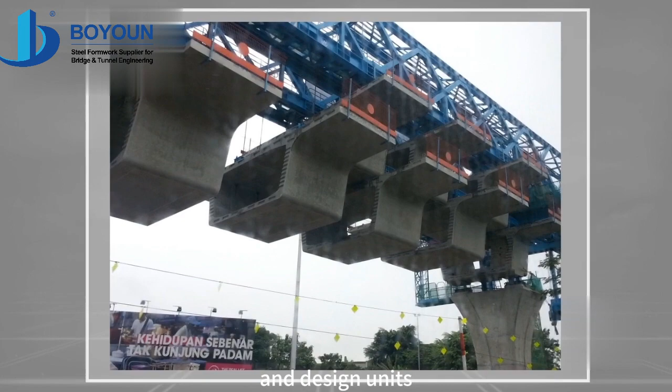With the rapid development of railway and highway infrastructure construction, the segmental assembling method is more and more valued by the construction and design units, and has gradually been popularized and applied.

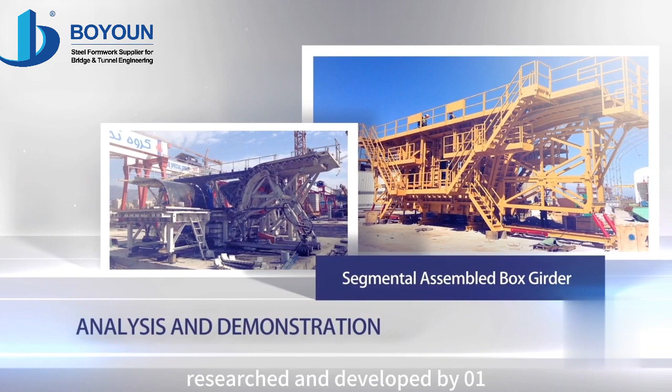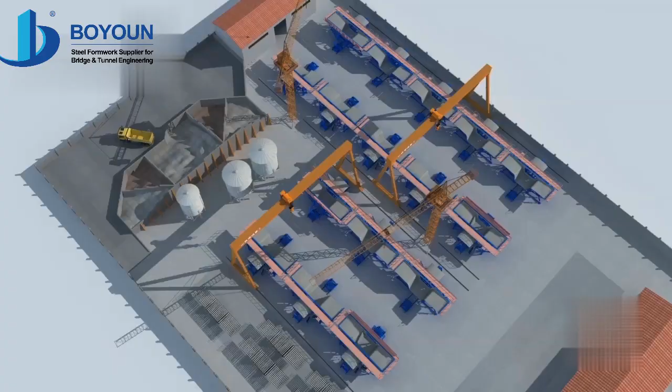Shandong Boyoun Heavy Industries Company Limited researched and developed the BY-01 automated segmental box girder prefabricated system through analysis and demonstration of segmental assembling technology at home and abroad, combined with its own experience in bridge formwork design, fabrication, and construction. The system has a clear structure, efficient operation, beautiful shape, and distinct edges. The construction method provided by this video is only for reference.

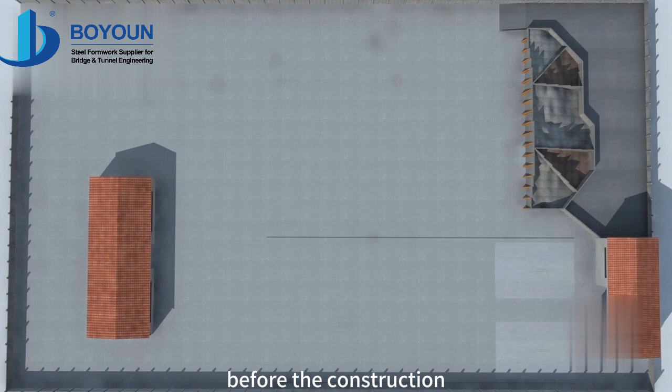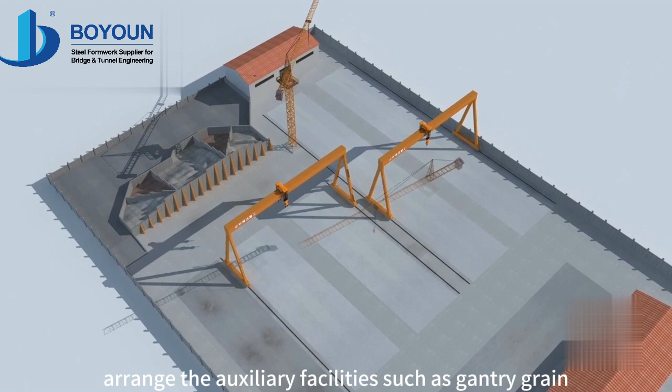Construction preparation: before the prefabrication of the box girder, complete preparations including hardening of the site and girder pedestal setting. At the same time, arrange auxiliary facilities such as the gantry crane, concrete curing equipment, and steel processing equipment in place.

Structure introduction: the system is composed of the bottom formwork system, side formwork system, end formwork system, internal formwork system, and preset system, among others.

Bottom formwork system.

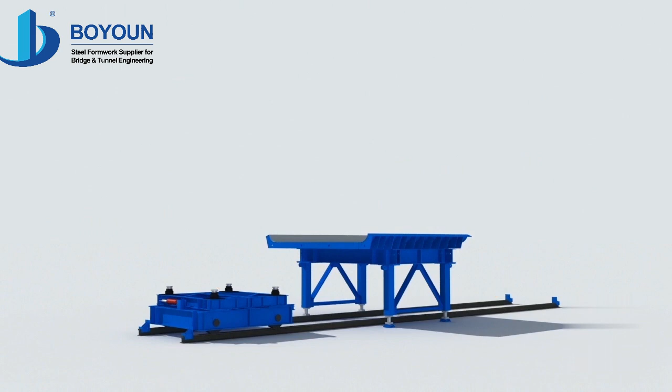Side formwork system.

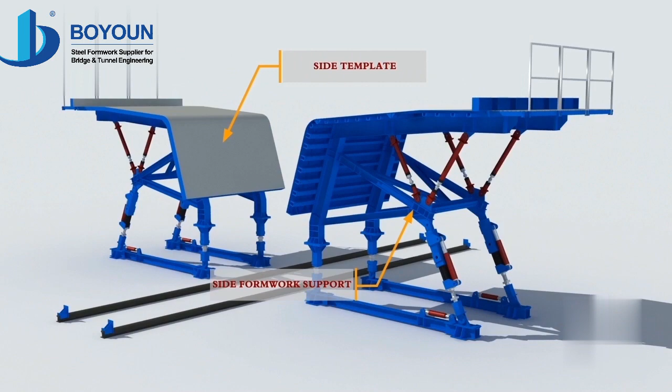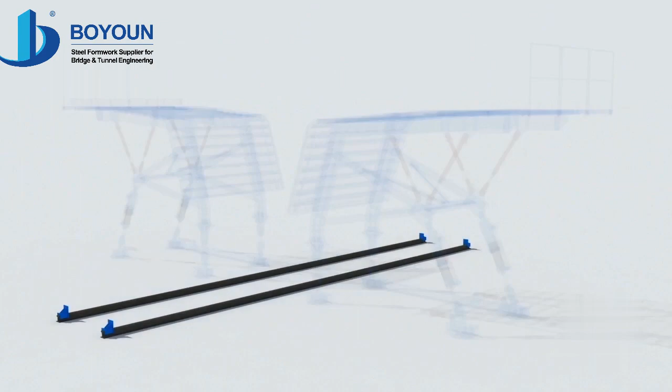End formwork system.

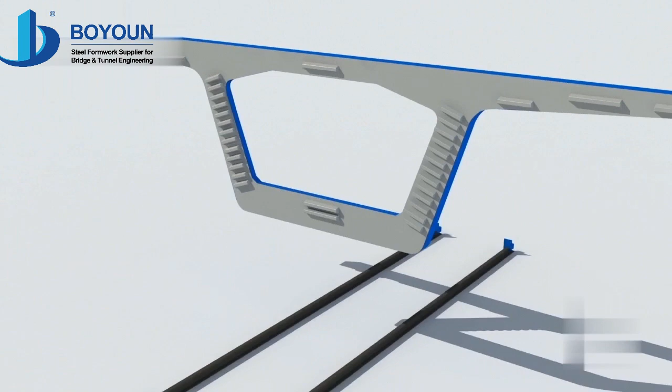Internal formwork system.

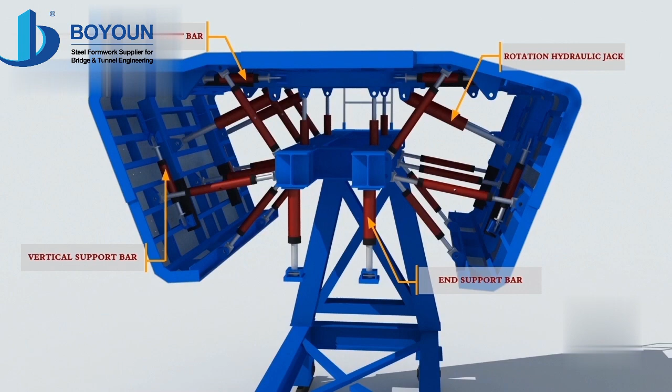Prefabrication construction: formwork assembly in accordance with the design drawings, step by step, to assemble various systems of formwork and adjust them in place.

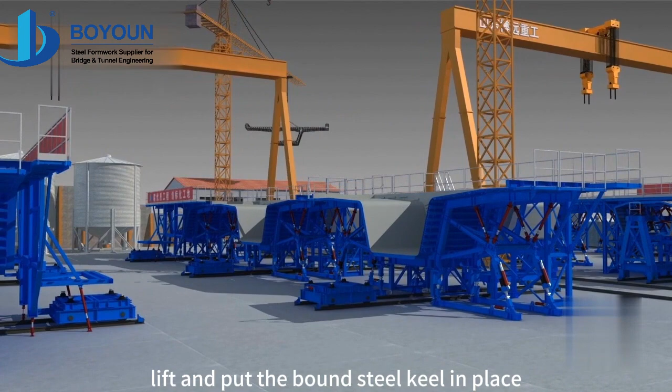Laying of the keel: lift and put the bound steel keel in place.

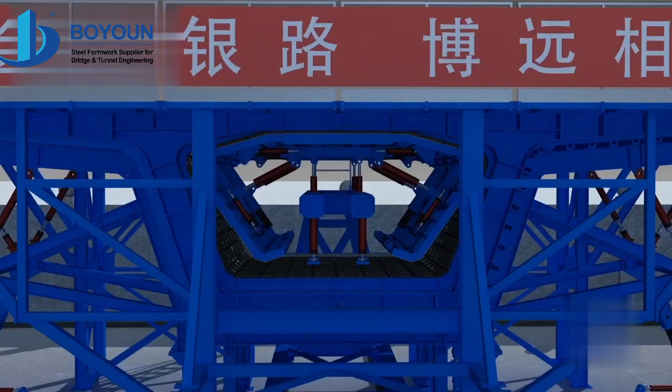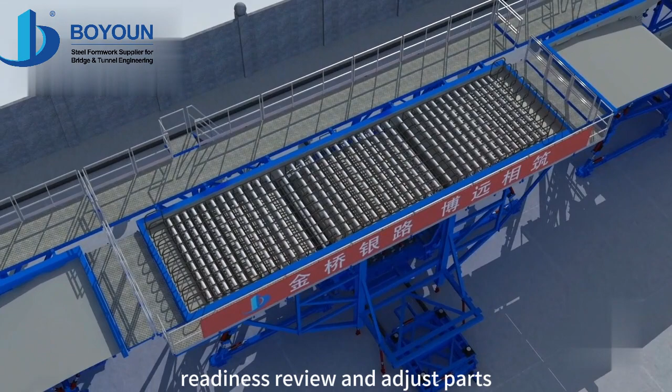Readiness: review and adjust the parts location of the formwork system. Ready to cast concrete.

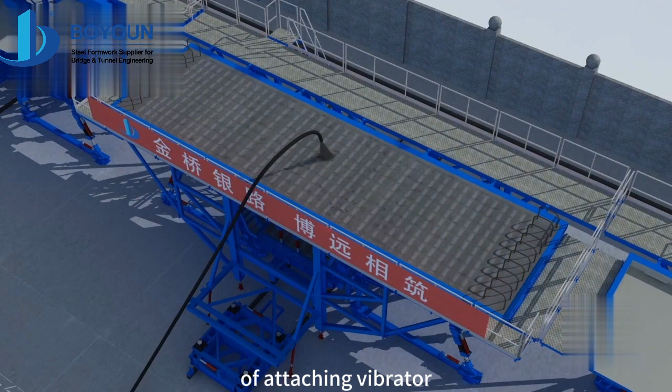Cast one section of concrete according to the sequence of bottom formwork first, web formwork second, and roof formwork last. The casting process uses the joint vibration method, with attaching vibrators as the priority and immersion vibrators as a complement, so as to ensure concrete casting quality.

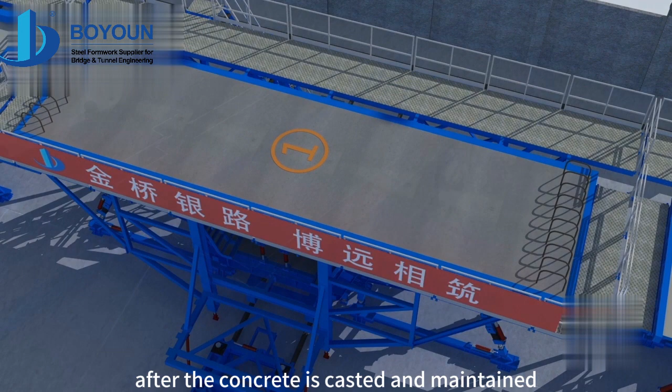Formwork removal and maintenance: after the concrete is cast and maintained to removal strength, check whether the hydraulic system is normal via the hydraulic control system, then successively remove the mobile end formwork, internal formwork, and external formwork.

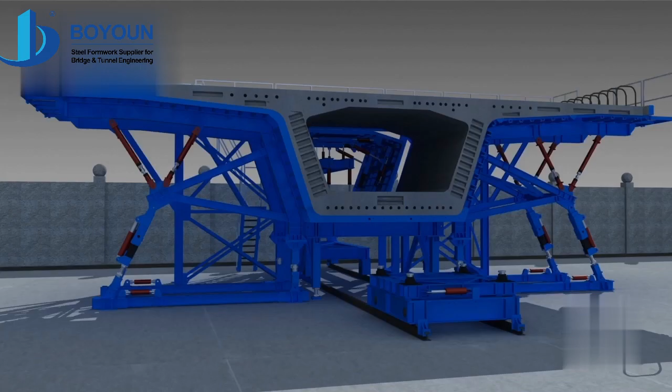Lifting, movement, and storage of the girder section. When one section's strength meets the design requirements, proceed to cast the second section.

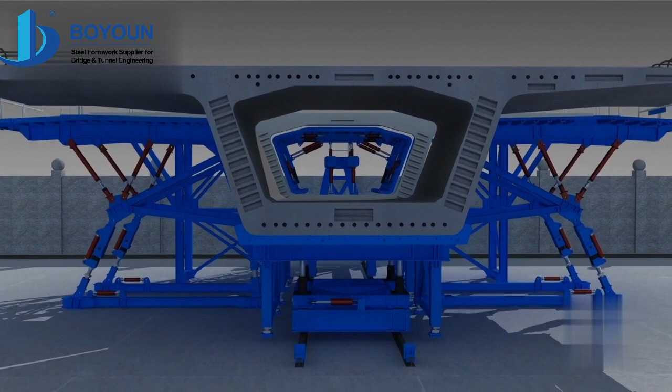When casting the second section, it is matched with the first section. The other processes are similar to those described above.

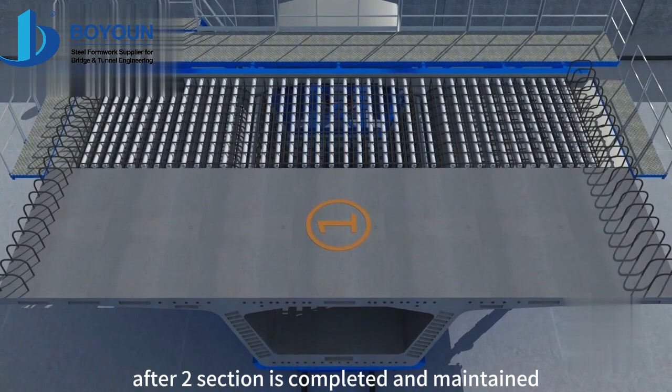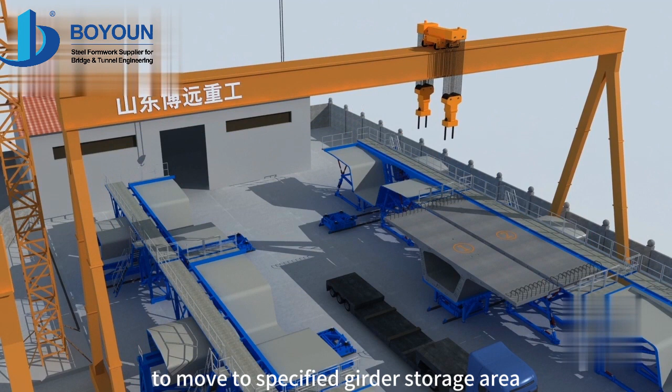After the second section is completed and maintained to formwork removal strength, the first section can be lifted, moved and stored by the lifting device, using the method of vertical lifting and longitudinal separation to move it to the specified girder storage area. This completes the circular prefabrication of all sections in turn.